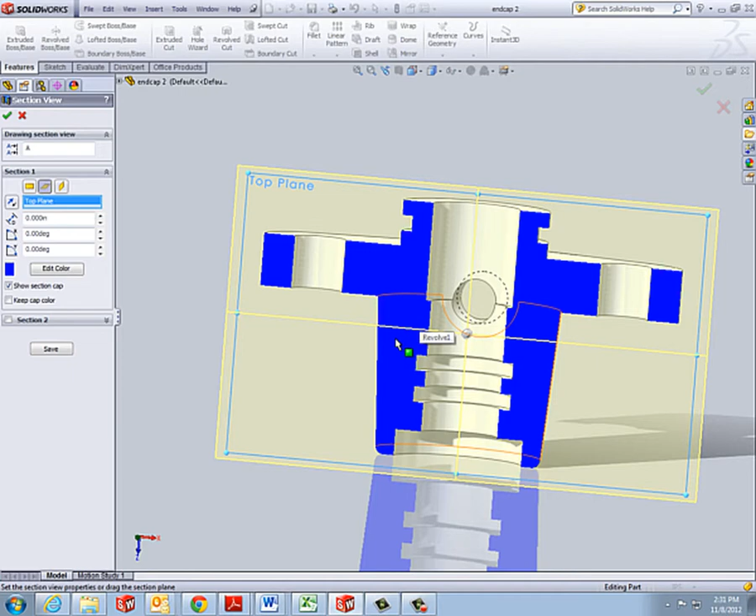If you look at a section view of it, we're going to have some rings cut into it, some stuff through the center of this.

So we're going to do a lot of this with a revolved boss base. We're going to start by opening up a new part, and we're going to start by drawing on the front plane.

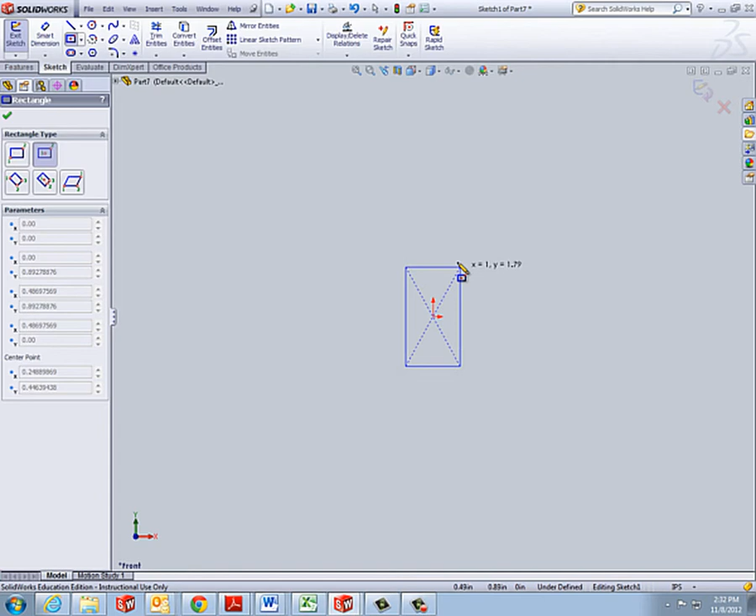I'm going to draw a rectangle, center point rectangle from the origin, and we're going to smart dimension it to 0.75 by 1.85.

I'm going to draw a circle in line with the origin, and I'm going to smart dimension that circle to 1.1.

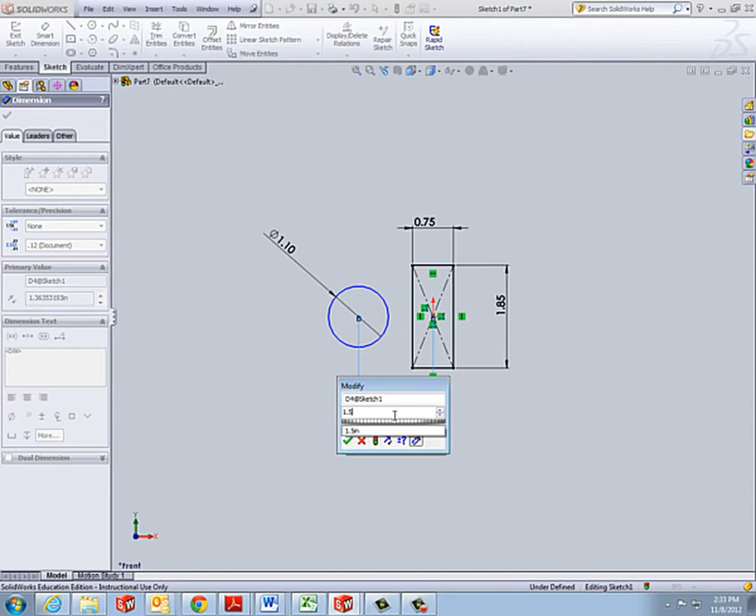Now I'm going to grab a line, and from that circle I'm going to draw a line to that corner, and make sure you don't grab a quadrant. I'm going to do the same thing on the bottom.

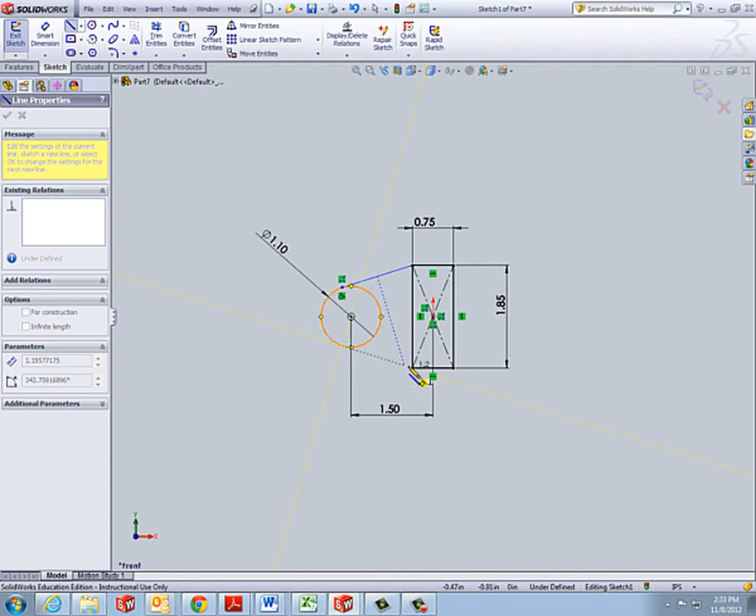Now I can grab trim, and I'm going to trim out that half of the circle and everything inside that square. So I used power trim, and I just click down and drag around all that stuff to get rid of it. I'll accept that.

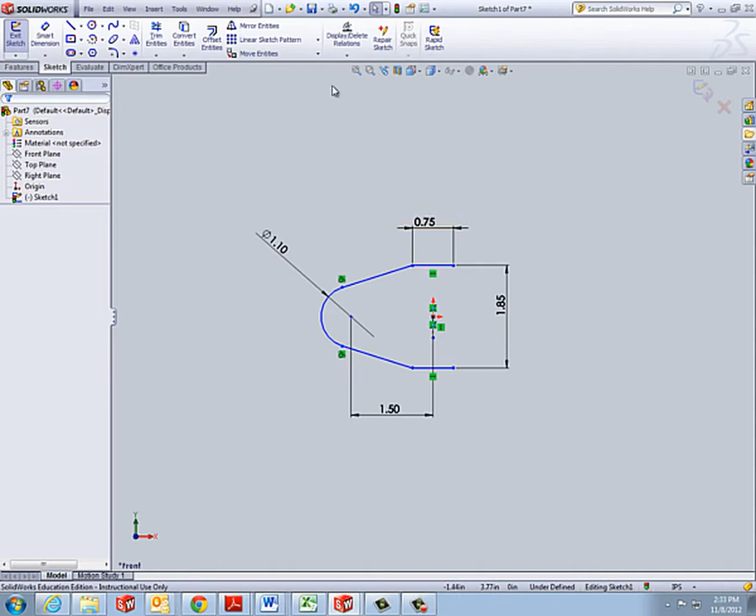Now I'm going to draw a center line vertically from the origin so I can mirror these three entities.

The line to mirror about is that center line that I made, and I'm going to accept that. I can delete the center line now - you can keep it too, I just like to clean it up a little bit.

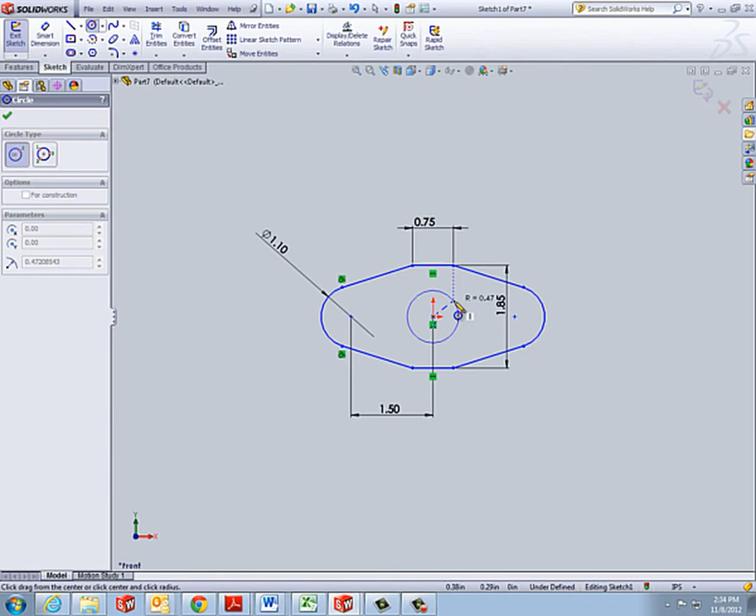Then I'm going to draw one more circle on the origin, and I'm going to smart dimension it to 0.85. This is what you should have.

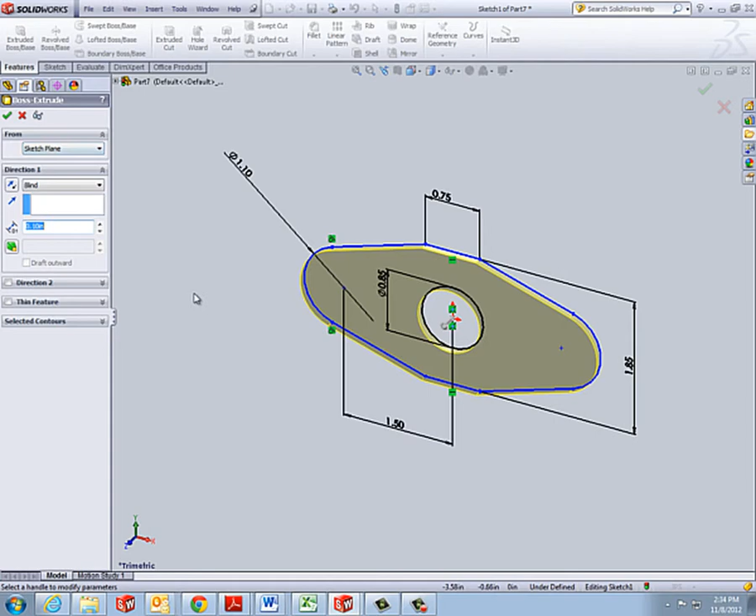I'm going to go to features and do an extruded boss base, extrude it 0.5 inches, and I'm going to accept that.

Now I'm going to do a sketch on the top plane, and I'm going to go to normal to, and I'm going to start creating that profile that we're going to revolve.

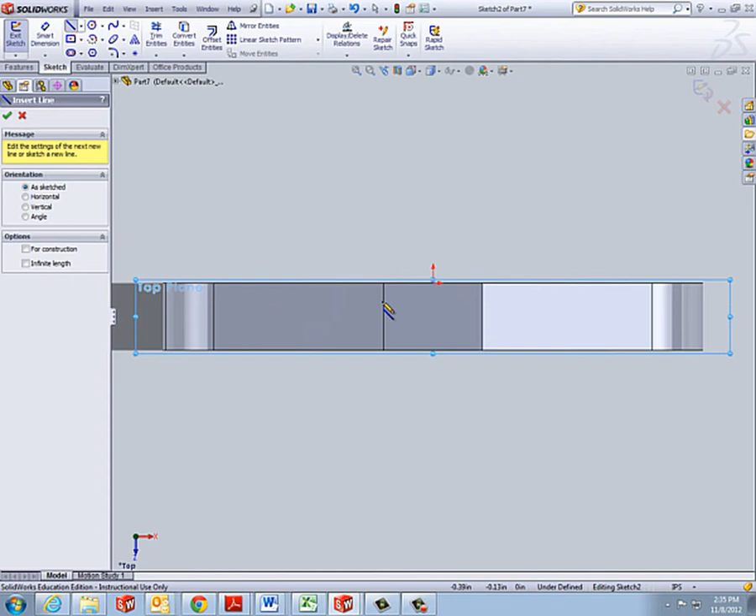So if I grab line, where I'm going to start is, since I know this flat spot is 0.75, on this side of this line I'm going to start drawing.

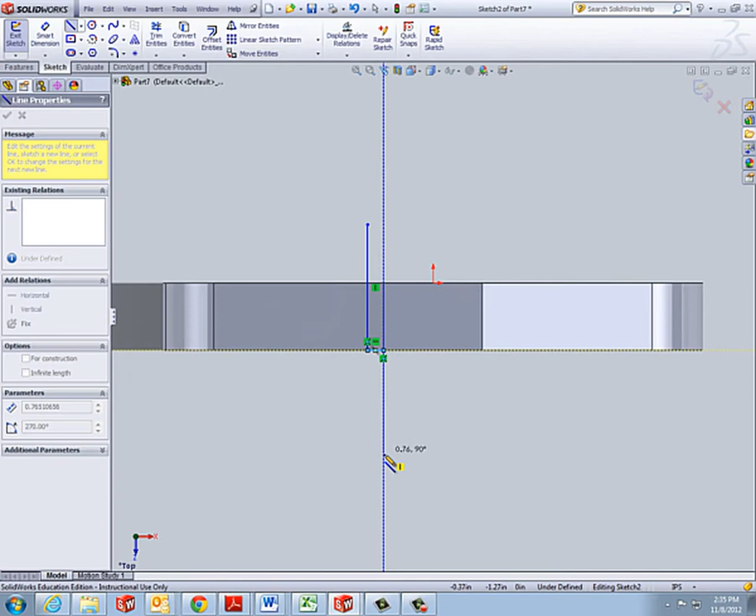I'm just going to draw a line that comes down, connects on that edge, comes over to that end point. We're going to come down, go over horizontally, and when we do this one, avoid lining it up with these dashed lines.

They'll make relations that we don't really want. So we're going to bring it horizontally over, vertically down, come over. We're going to draw a line that comes up at an angle, any angle.

And just connects on this edge - try not to hit the midpoint. We're going to come over horizontally. We're going to come up till we're in line with that endpoint.

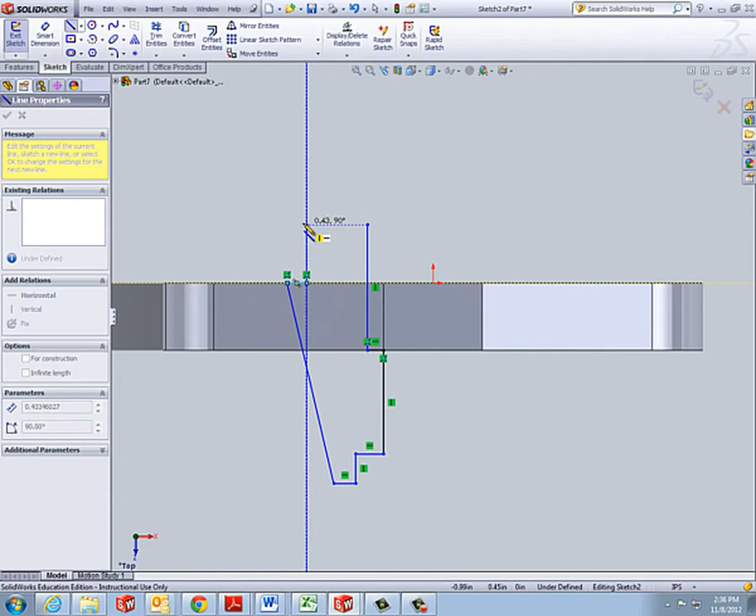And we're going to connect those. This should be the shape that you have.

Now what we're going to do is we're going to start smart dimensioning this. So if you hold down shift, I can smart dimension. Let's draw a center line in there so we can do some diameter dimensions.

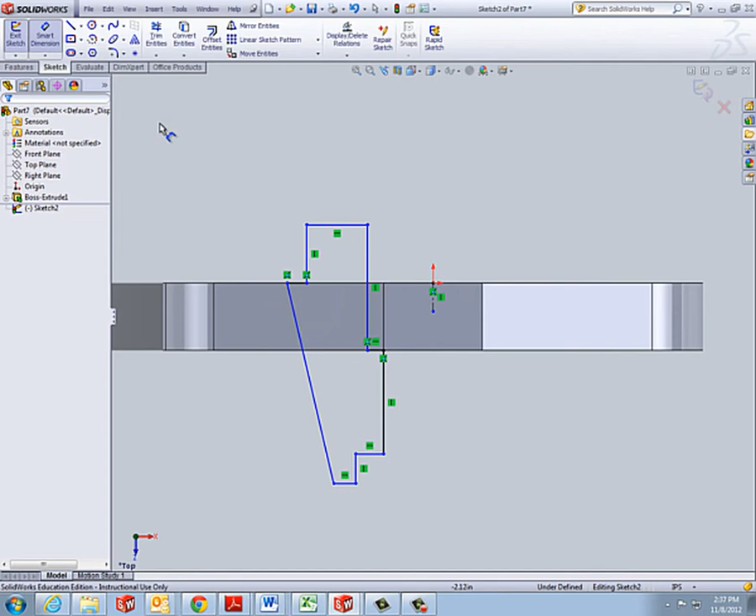So I'm going to grab a center line, and from the origin draw a center line vertically down. I'm going to smart dimension - now if you hold down shift, click on that line and that center line, I can do a diameter dimension, and I'm going to make that 0.85.

I know that the dimension from this, its diameter, is going to be 0.75 because it's on that endpoint. So I don't really need to put the dimension in there, but I'll put the dimension in just for clarification. And we're going to make this a dimension driven.

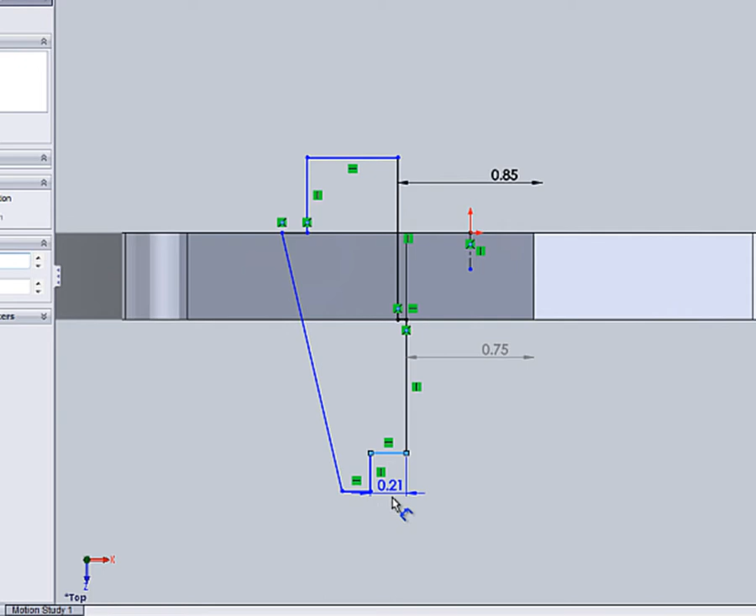I'm going to go through and start dimensioning all these lines. This is going to be 0.25. This line is going to be 0.25.

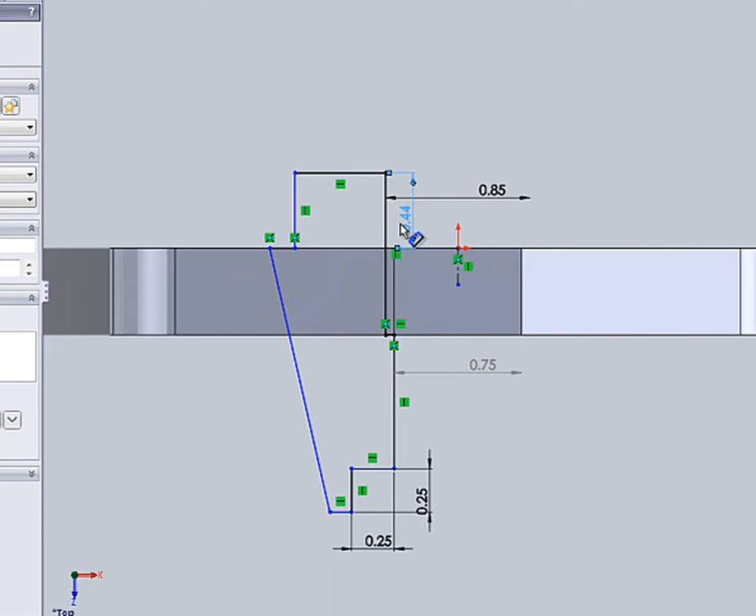If you grab this line and that edge, we want that to be 0.435. We want that line to be 0.435.

We hold down shift, click on that endpoint and that center line. We want that to be 1.85.

And we're going to grab that line. From that line to that edge, it's going to be 1.5.

We're actually going to change one dimension here. Let's delete that dimension up top, because that was actually supposed to be from that edge. Shift from that edge to the center line is going to be 1.435.

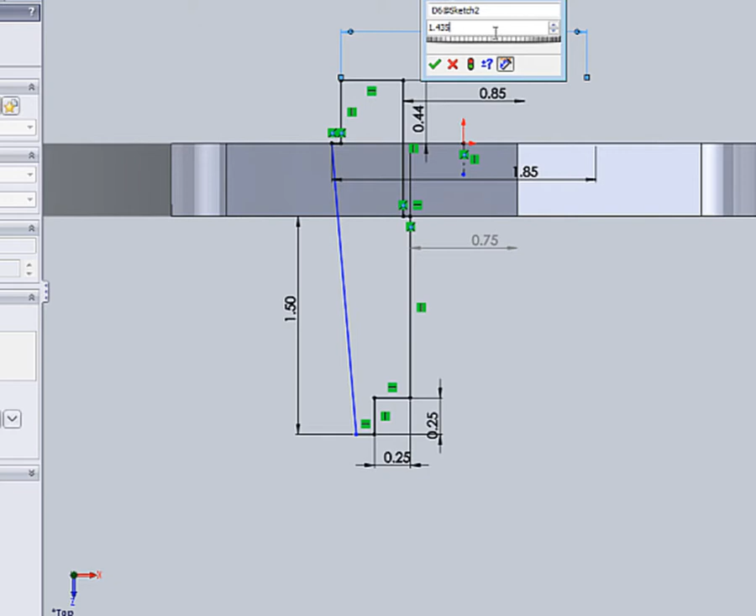And from that endpoint to that center line is going to be 1.5.

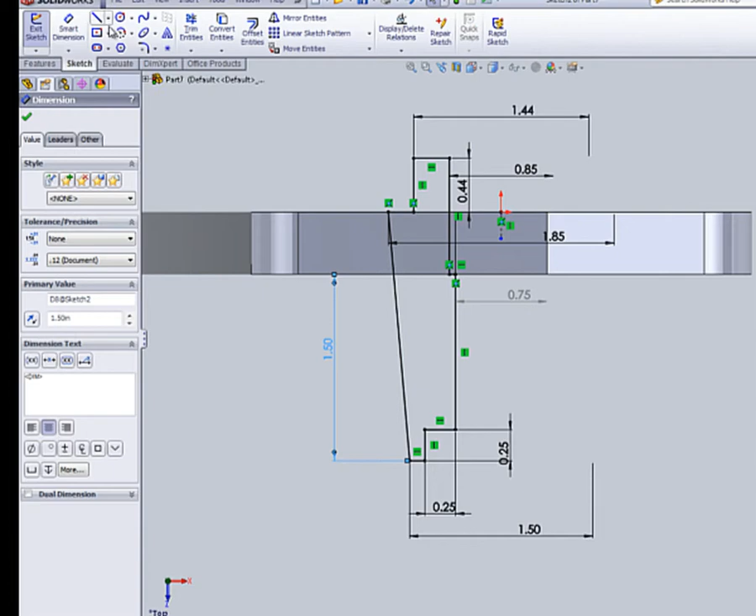Now we need to add a couple things to this. We're going to add a fillet. So if you do sketch fillet and we hit that line and that line, we're going to make a fillet that's

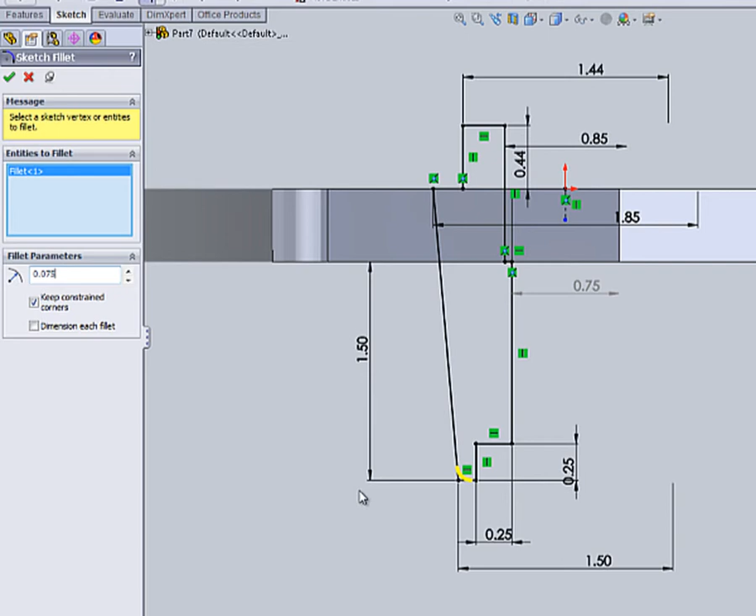0.075. We're going to accept that. Drag that dimension out of the way now.

And we're going to draw a box.

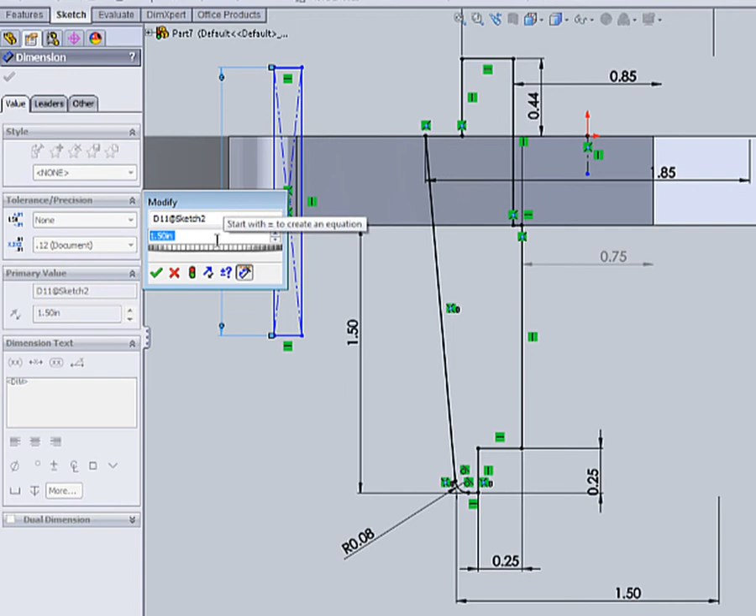This is the way that I like to do it, because we need to add those rings into parts of this end cap. How I do it is I'm going to smart dimension this box to 1.5, or 0.15 by 0.2, and now I can copy this box a couple times and it'll be easier to move around.

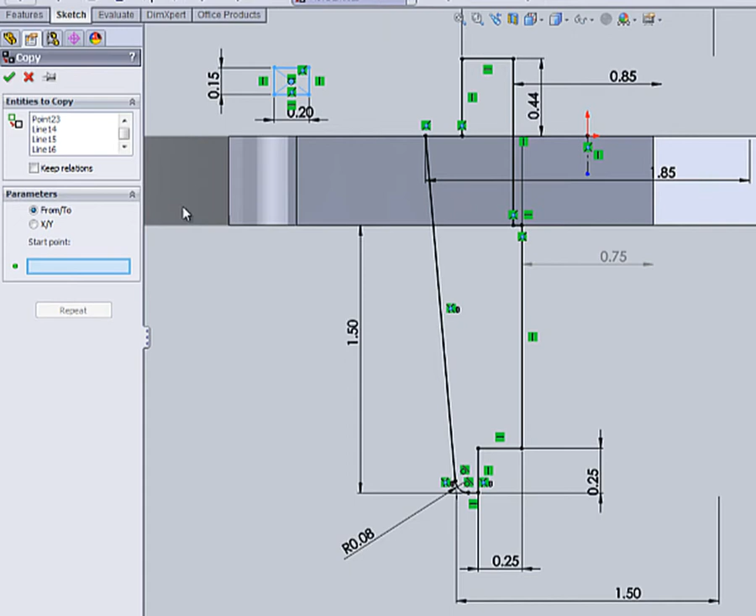If you click on the down arrow on move entities, you go to copy entity, and if we drag over that box, we can do a from to. So we'll click on our from to box, and we're going to do from the center point. We're going to put that on the midpoint of that line.

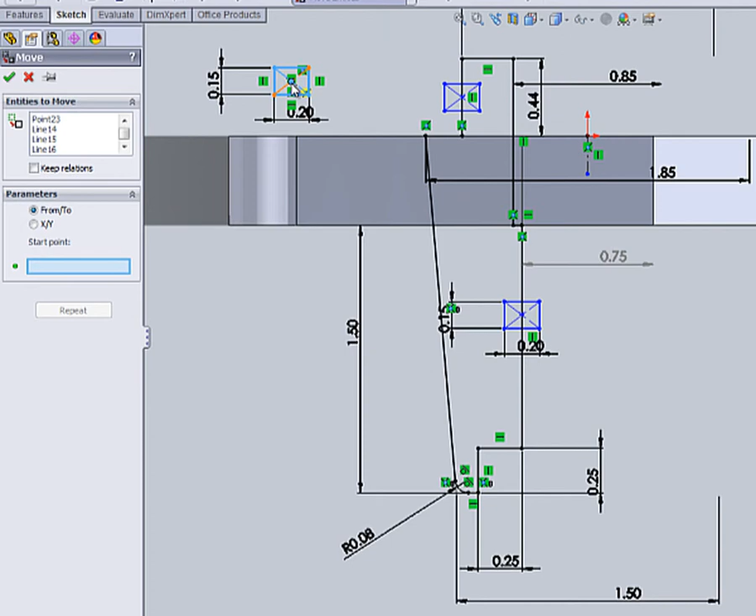And we're going to do this two more times. From that center point, we're going to place it on the line. And this last one we can just move from to center point onto that line. Now we can position these a little bit easier. This one's already where we want it, we wanted it on the midpoint.

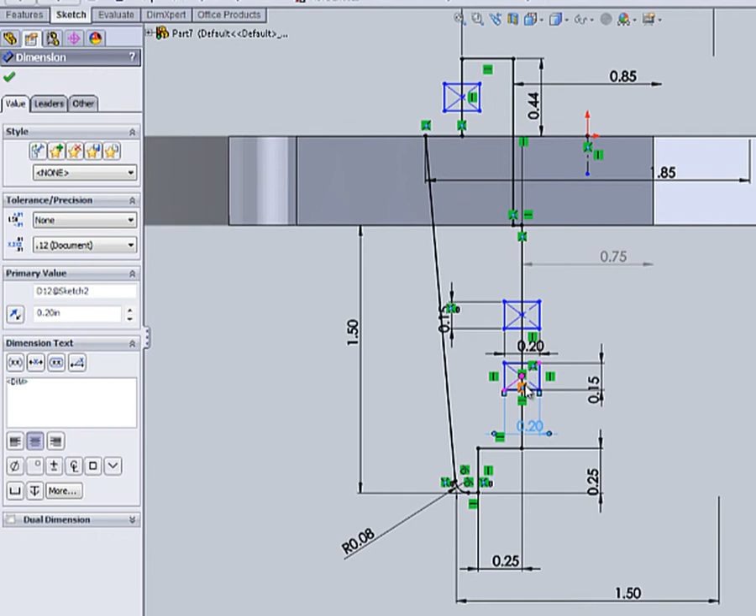These other two, we need to dimension from its center point to this edge. We want it to be 0.3. And from this center point to this edge, we want it to be 0.6. Well, that didn't keep the relations we wanted, so let's undo that.

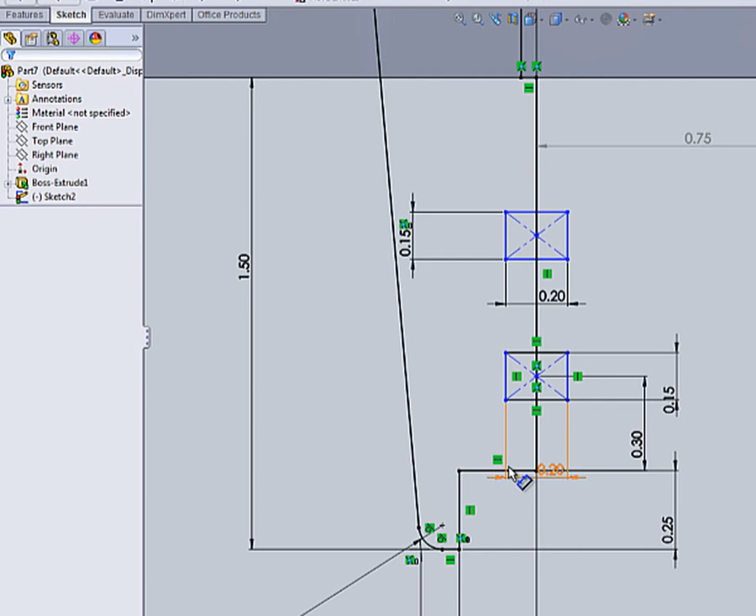And we're going to dimension from that edge to the bottom edge of that square. It's going to be 0.6.

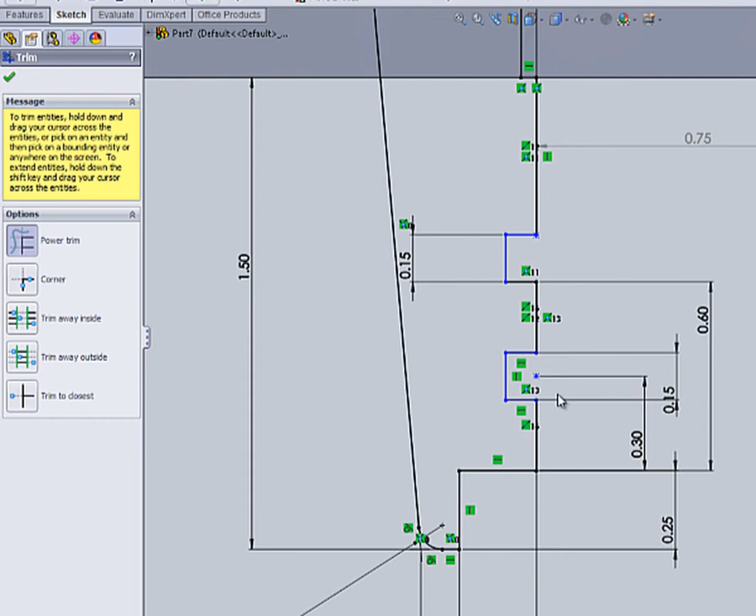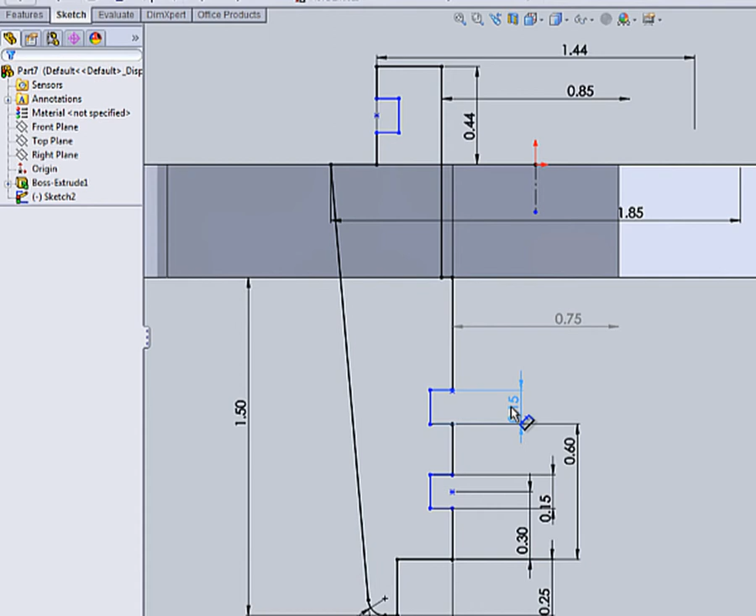Now what I'm going to do is I'm going to grab trim, and I'm going to start trimming out a bunch of these lines. So I use power trim, I just drag through all the lines that I don't want. And we're going to leave ourselves with that shape. That's the profile that we want to revolve.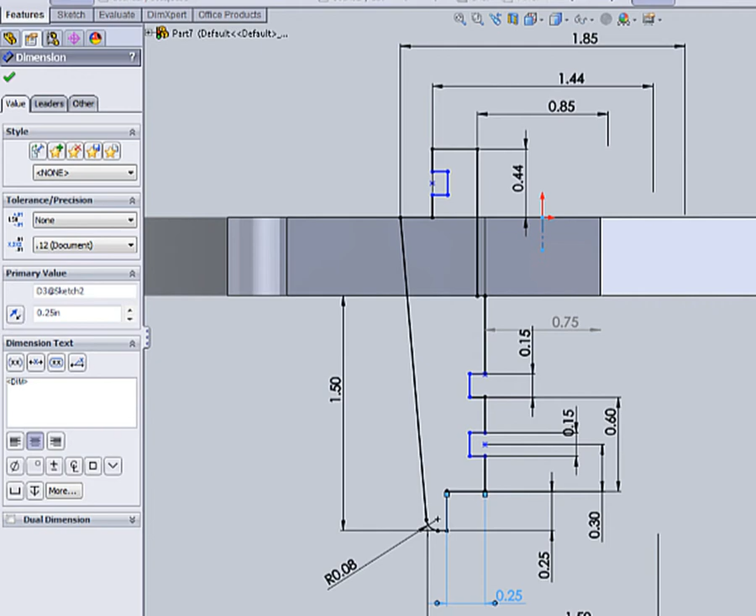After we have all the dimensions on there, place these up so you can see them a little better. Those are the dimensions we want, and we want to go to features and do a revolved boss base, 360 degrees. Make sure thin features isn't checked, it will not give you what you want, and we're going to accept that.

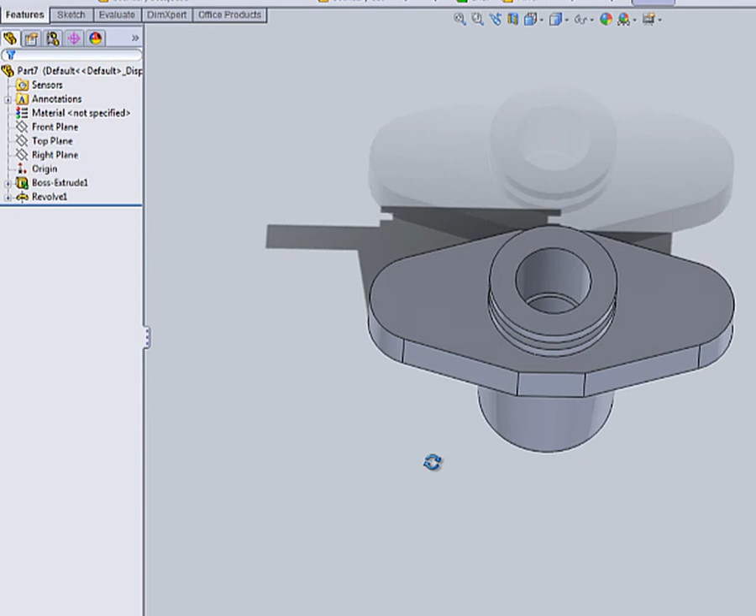And now we pretty much got the shape we want. We just need to put the holes in those wings and drill our hole for our port for our hydraulic fluid. But first we're going to save this as our forged Endcap-2.

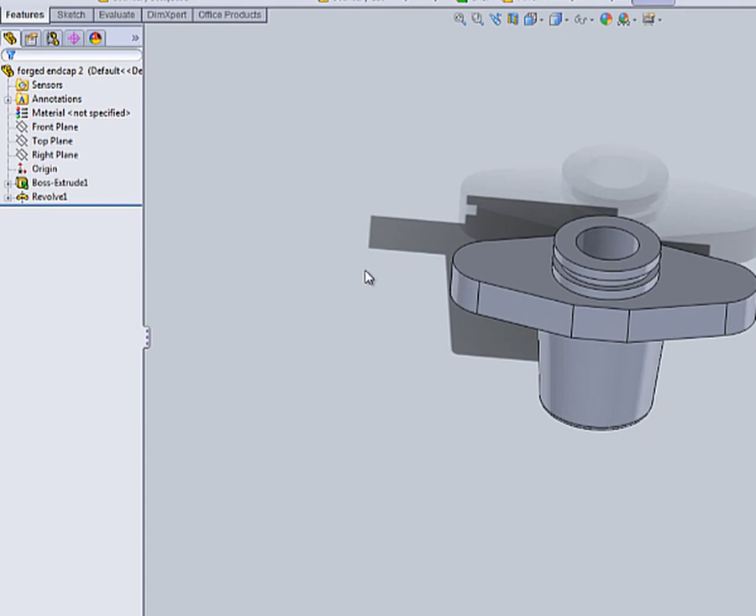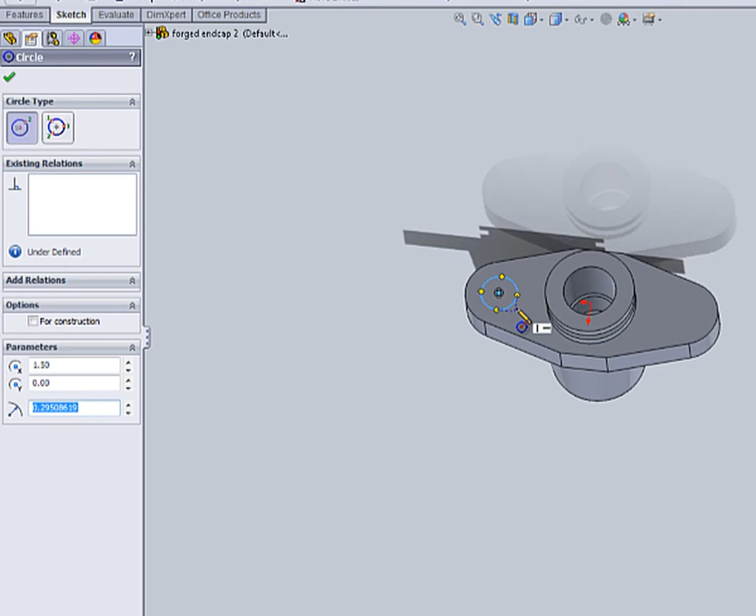And now we can start going in, placing those holes. So first I'm going to do an extruded cut on that face, or the top plane, or the front plane, you could choose. And I'm going to grab a circle, and if you touch on that arc, you can find the center point. And I'm going to draw 2 circles on those center points, and I'm going to smart dimension them to 0.5.

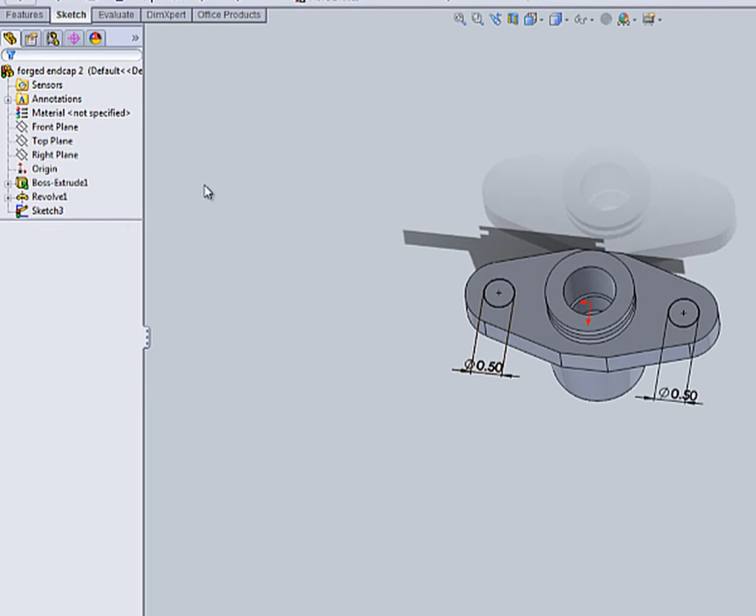And we're going to do an extruded cut. And it's doing it at 0.5. You can also do through all, but we want it to go 0.5, and we'll accept that.

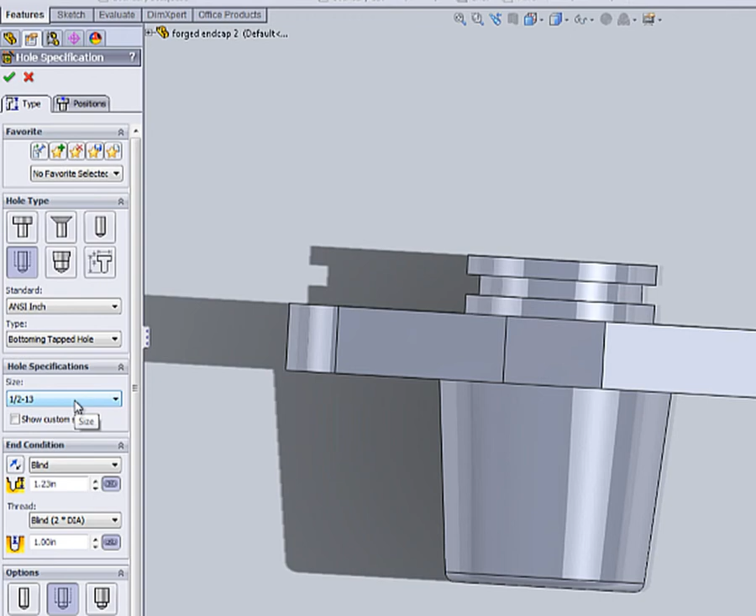And then we're going to use Hole Wizard. We're going to do a straight tap, ANSI inch. We're going to do a 1/2 inch hole. Okay, and we want to do a Hole Wizard, but before we do a Hole Wizard, we want to round off that edge of this flat spot.

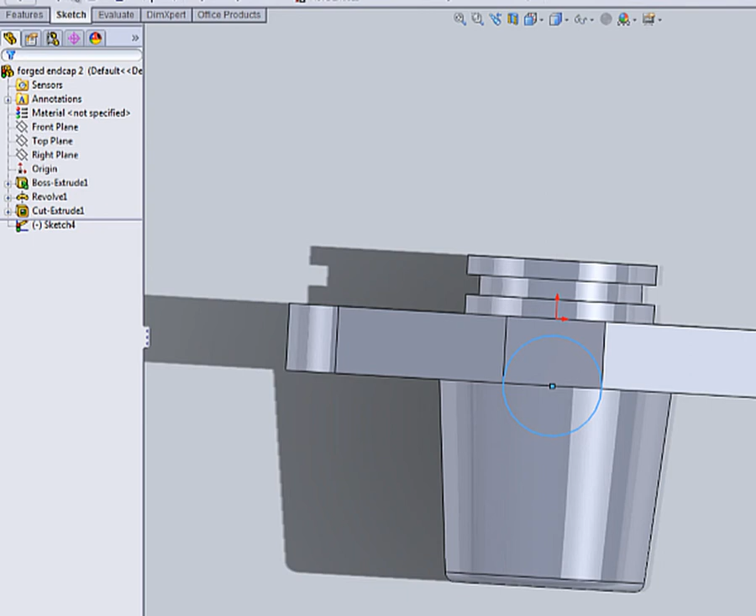So what we're going to do is we're going to open up a sketch on that face, and we're going to draw a circle from that midpoint to that end point, and we can draw a line from that end point to that end point, and we'll trim away the top half of that circle, leaving us with that.

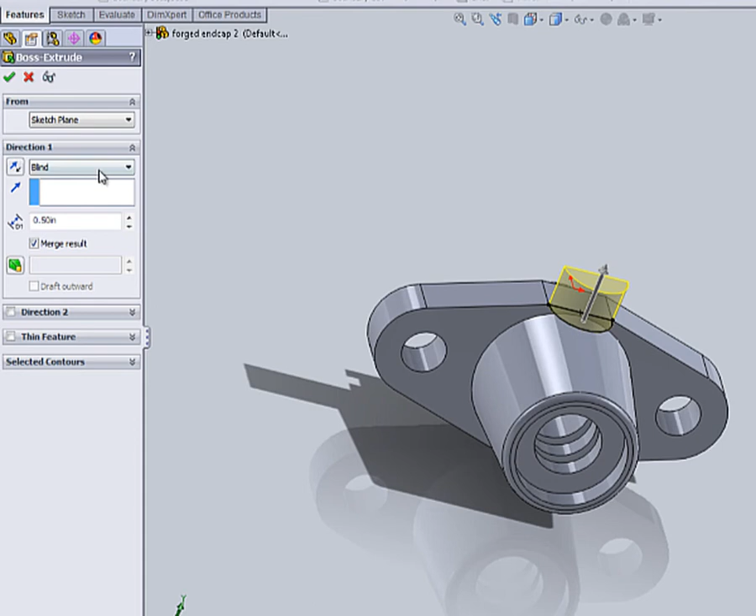Now we can do an Extruded Boss base, and instead of doing blind, we're going to do up to surface, and we're going to choose that surface, and we're going to accept that extrude.

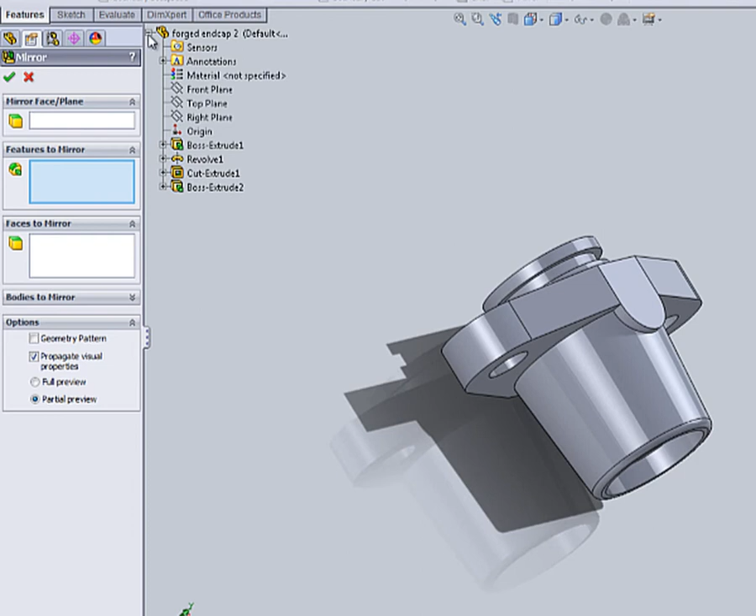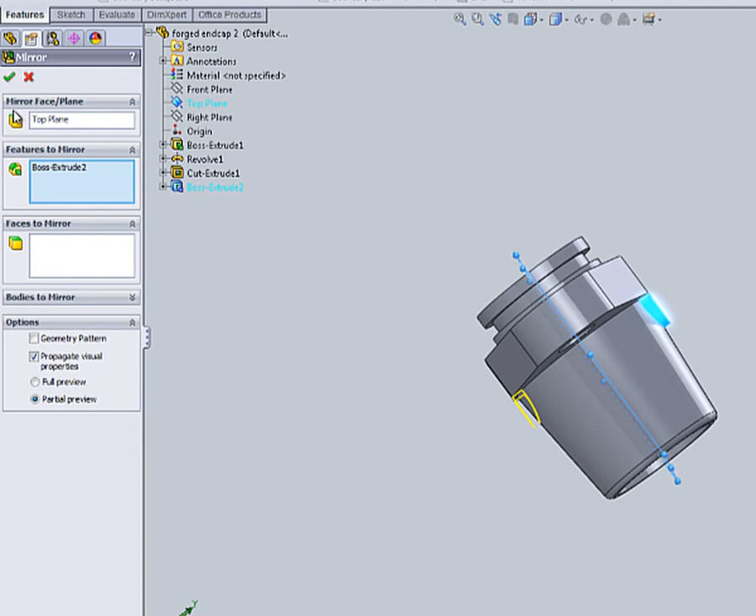And we're going to do a mirror feature. So if we do feature to mirror, we can drop down this feature tree, and we can click that last feature we made, and we're going to mirror over the top plane, and we're going to accept that, and that saves you time from having to draw that again.

And now I can come back, and we're going to do a Hole Wizard. We're going to do a straight tap, ANSI inch, a 1/2 inch hole, and on this one we can do up to next, or we can choose a surface. We'll see if up to next works.

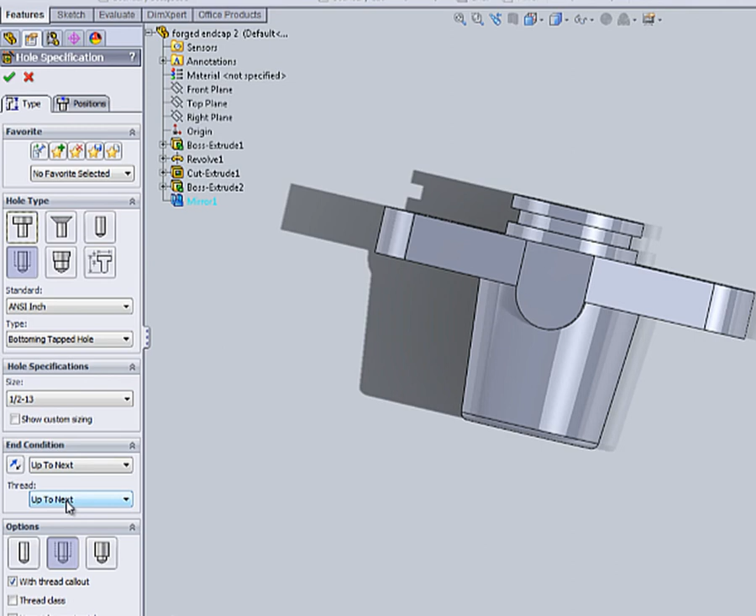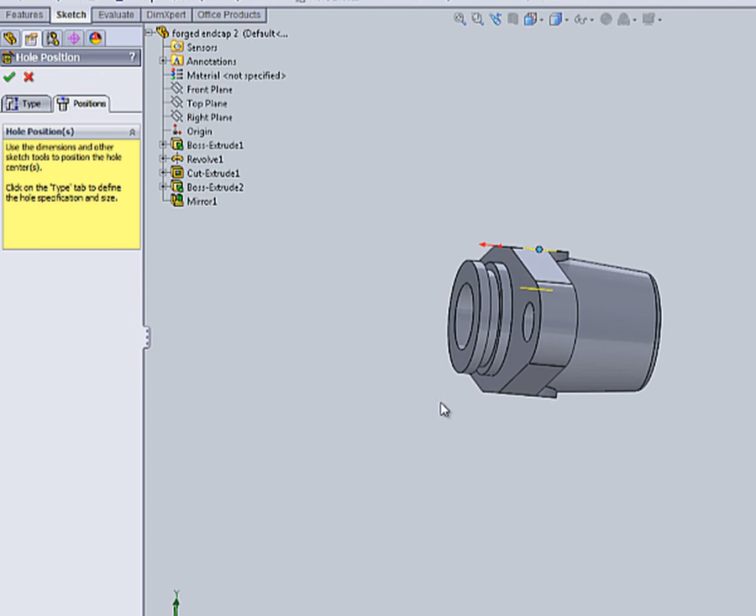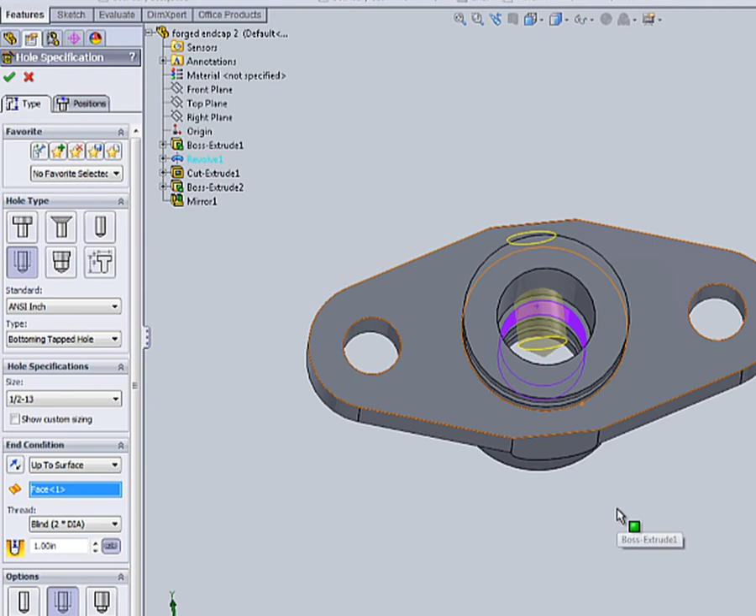And if you click on the position tab, we can position it on that face, on that center point of that arc. And to make sure that it goes all the way through, on type, instead of doing up to next, let's do up to surface, and we can choose that surface to go up to, because we want it to go all the way through that, and that's what we'll be left with, and we'll accept that tapped hole.

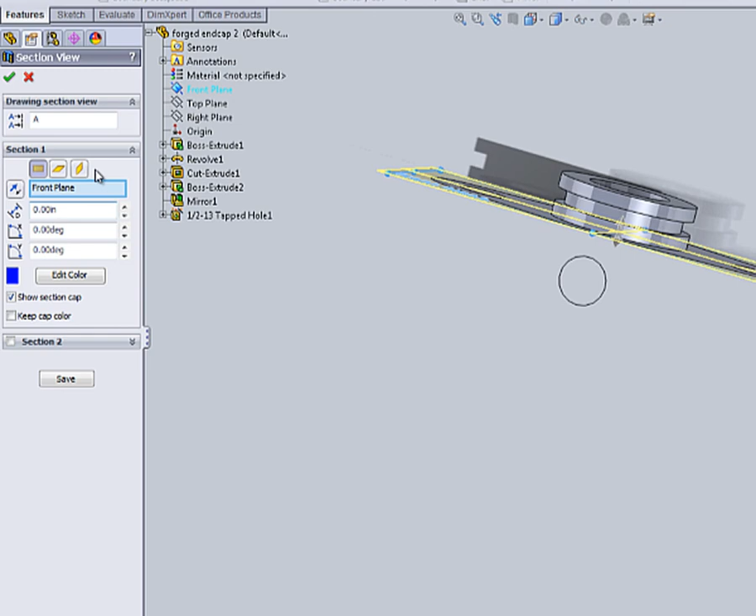And that's it. Now we have our second end cap. You can look at a section view of it and see that we have the same end cap. And save this as forged endcap 2.